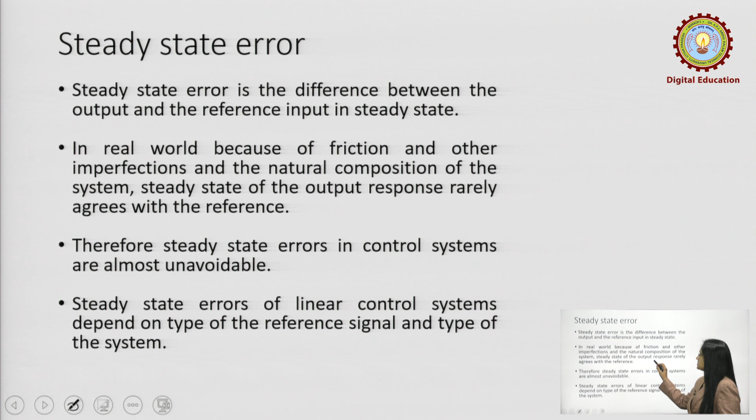Steady state error is the difference between the output and the reference input in the steady state. In the real world, because of friction and other imperfections and the natural composition of the system, the steady state output response rarely agrees with the reference. We expect a certain value of output as the desired output, and achieving that desired output is actually not very easy, just because the real world has many imperfections and natural composition. There are various elements in the system, and due to these elements, obtaining the steady state value or the desired value is not very easy.

The steady state errors in control systems are almost unavoidable, and steady state errors of a linear control system depend upon two quantities. One is the type of the system, and the other is the reference signal. Reference signal means whether it is a step input, a ramp input, or a parabolic input, because different test signals are applied to a control system to check its response for different kinds of input. So that becomes the reference signal, and now we will understand what is the type of the system.

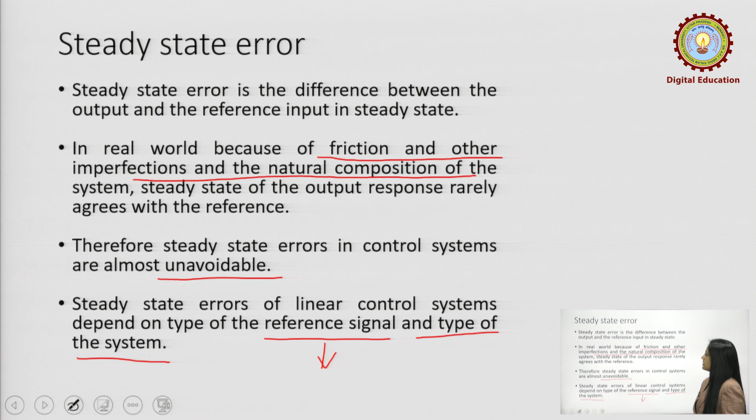Now, to understand the type of a system, what do we mean by type of a system? We are going to consider a control system with unity feedback. R of S is the reference input, E of S is the error signal, and C of S is the output. G of S is the forward path transfer function, and H of S is 1, since it is a unity feedback system.

So what is the output C of S? C of S is equal to the forward path transfer function multiplied by E of S. And what is E of S? E of S is the output of the summing point, that is the difference of the signals. C of S is compared with the reference signal R of S, so E of S is R of S minus C of S. And what is C of S? It is the forward path transfer function multiplied by E of S. Substituting this relation, we get E of S, the error signal, which is the difference between the reference input and the output. Therefore it is known as the error signal.

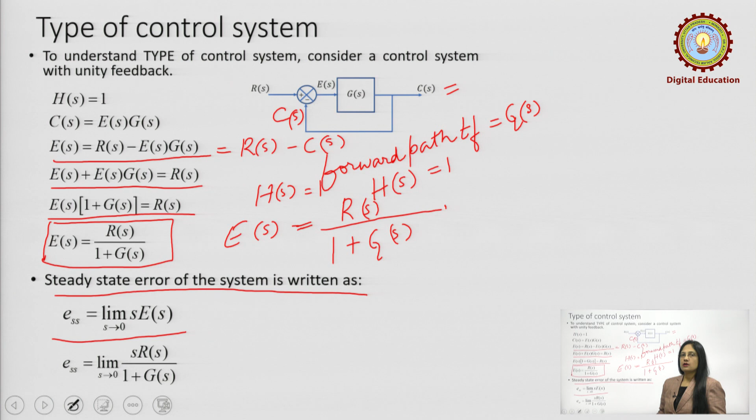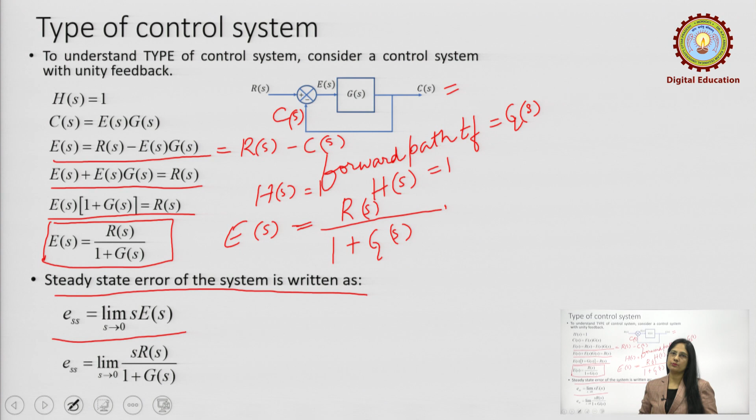Steady state error is the difference of the reference input and the output when time reaches infinity. So in the S domain, following the limits, limit S tends to 0 — that is the final value theorem — operating on the final value theorem, the steady state error is equal to limit S tends to 0 of S times E of S. This comes from the relation of the final value theorem. And what is E of S? E of S is R of S upon 1 plus G S, where G S is the forward path transfer function and R S is the reference signal given to the system. Therefore, the value of steady state error is limit S tends to 0 of S into E of S. So we can see that the steady state error is dependent upon the reference input R of S.

Now, what do we know by type of the system? What is type of the system? Type of the system is the number of poles G of S has at S equal to 0, and that decides the type of the system. G of S is the forward path transfer function.

For example, G of S is 10 S plus 2 upon this denominator. Here you can see that there is only one pole at origin, S equal to 0, meaning the number of poles at origin. If the number of poles at origin is 0, then it is a type 0 system, and if the number of poles at origin is 1, then it is a type 1 system.

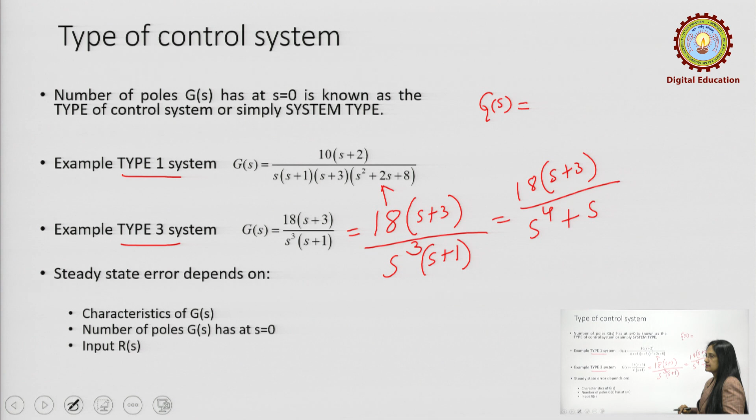So, the type of this system is 3, whereas the order of the system is 4, because when you multiply this, it becomes 18 S plus 3 S raised to 4 plus S. So, the order of the system is 4 and the type is 3. The number of poles at the origin decides the type of the system.

Here it is a type 3 system.

Similarly, if you have, for example, G of S equal to 18 upon S square times S plus 1, this is a type 2 system, whereas the order of the system is 3.

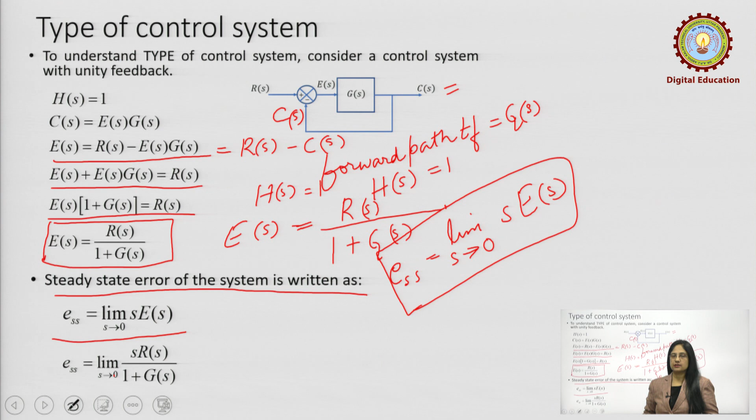So, therefore, steady state error depends on what is the characteristics of G of S. We know this relation because steady state error has a term G of S. So, characteristics of G of S, that is the transfer function, forward path transfer function, and the number of poles G S has at S equal to 0, and what is the reference input.

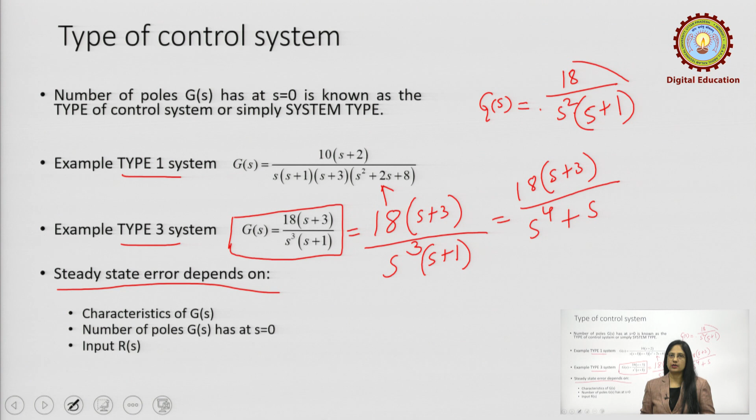What is steady state error with step input function? Now, for a step input function, R of S is 1 upon S.

Now, we will understand in the further lecture how the type of the system and the reference signal are related to the steady state error of a system, because steady state error is S into R s upon 1 plus G s. So, there is a term S in the numerator. So, type of the system affects the steady state error as well as the reference input signal given.

Now, we will study this for a unit step function, and we will study this for a ramp function as well as a parabolic function. We will understand what would be the steady state error when different inputs are given for different types of the system.

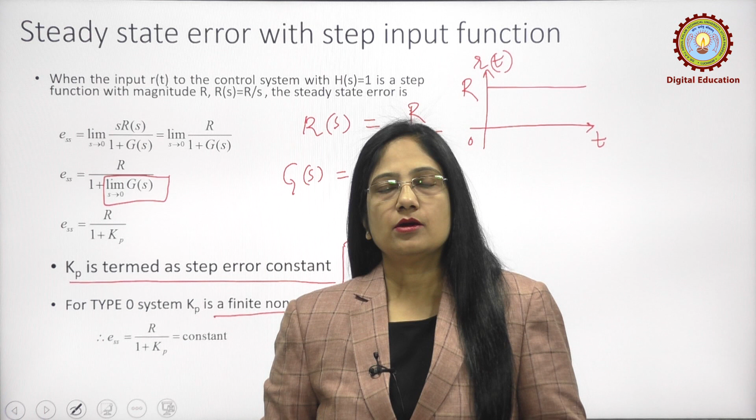When there is no pole at the origin for a type 0 system, Kp will always have a finite non-zero value, because limit s tends to 0 of G of s is Kp. For example, if G of s is a type 0 system like s plus 3 upon s plus 4, the constant Kp will have a finite constant value because there are no poles at the origin, so the denominator of G of s will not have any term s in it.

Therefore, for a type 0 system, Kp always has a finite, non-zero constant value. Now, what will be Kp for a type 1 system? For example, G of s equals s plus 1 upon s into s plus 3, this is a type 1 system. In this case there is one pole at the origin, so when you take s tends to 0, Kp becomes infinite. That is, for a type 1 system, Kp is infinite, and therefore the steady state error is 0 when subjected to a step input.

Similarly, for a type 2 system, Kp is infinite since G of s has two poles at the origin. For example, G of s equals s plus 1 upon s squared into s plus 3. This is a type 2 system because there are two poles at the origin, and when s tends to 0, G of s evaluates to infinite. Therefore, the steady state error is 0.

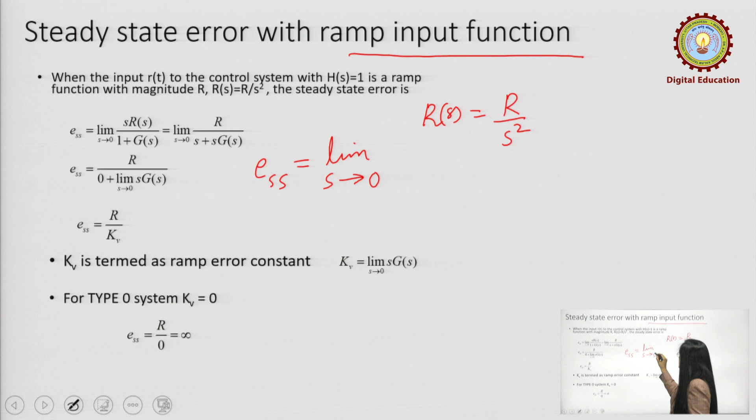So what is ESS? ESS is limit s tends to 0 of s times E s, and E s is R of s upon 1 plus G of s. So what happens now when we are applying a ramp function? ESS is limit s tends to 0 of s times r upon s squared, divided by 1 plus G of s.

Now only the term s cancels out, leaving s in the denominator, that is s plus s G of s. When you apply the limit s tends to 0, this quantity becomes 0, and limit s tends to 0 of s G of s is termed as Kv, the ramp error constant. So ESS now is R upon Kv. As we had seen, the step error constant Kp is limit s tends to 0 of G of s, whereas the ramp error constant Kv is limit s tends to 0 of s G of s.

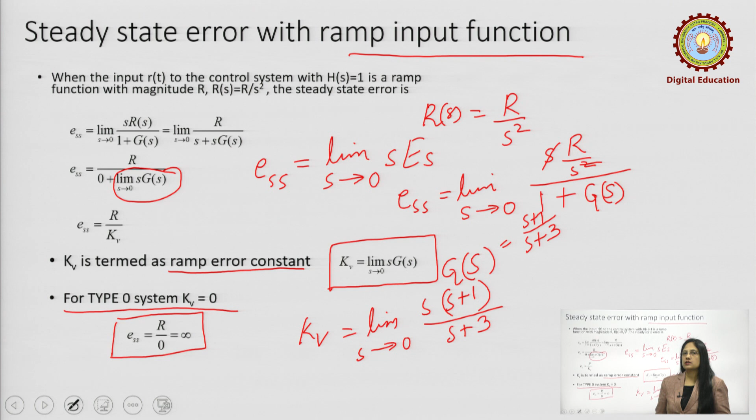So in this case, the ramp error constant will always give you a 0 value, because there is a term s in the numerator. So when you apply a ramp input for a type 0 system, the ramp error constant, that is the velocity error constant, will always be 0, and therefore the steady state error will be infinite.

Now for type 1 system, KV will always be a finite value. Let us take a type 1 system. In that case, G(s) for type 1 system is (s+1)/(s times (s+2)).

Now, in this case we can see that when sG(s) is evaluated, this type 1 s in the denominator will always cancel out with the term s present here, and therefore ESS will always be a constant value, because KV will be a constant value for a type 1 system, and therefore the steady state error will always be a constant value.

Now for type 2 system, the denominator of G(s) has 2 poles at the origin. When there are 2 poles at the origin, we can see what happens to KV when you evaluate G(s). KV is equal to limit s tends to 0 of s times (s+1)/(s square times (s+2)).

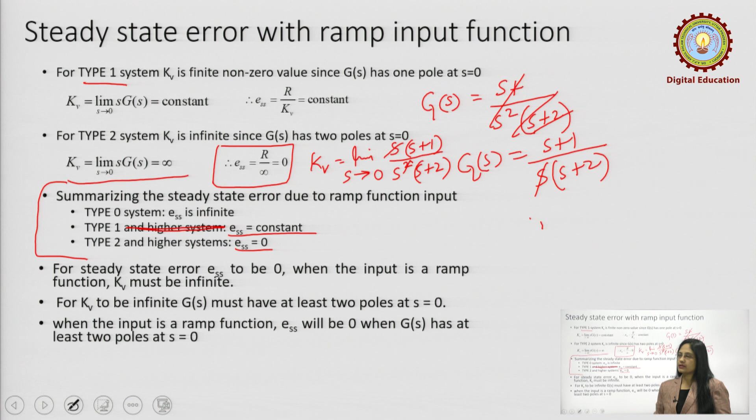Now, when the control system is subjected to a parabolic input, what will be the steady state error? As we have seen, ESS is equal to limit s tends to 0 of s times G(s), s times E(s). So it becomes sR(s)/(1+G(s)H(s)). Here R(s) equal to R/s cube is the reference input.

So replacing R(s), we have s square in the denominator. So ESS, applying limit s tends to 0, will give 0, and this term is known as the parabolic error constant, given by the relation Ka, where Ka is equal to limit s tends to 0 of s square G(s).

Now we will do the analysis for type 0 system. We understood what is a type 0 system. Type 0 system means there are no poles at the origin, and when there are no poles at the origin, what happens?

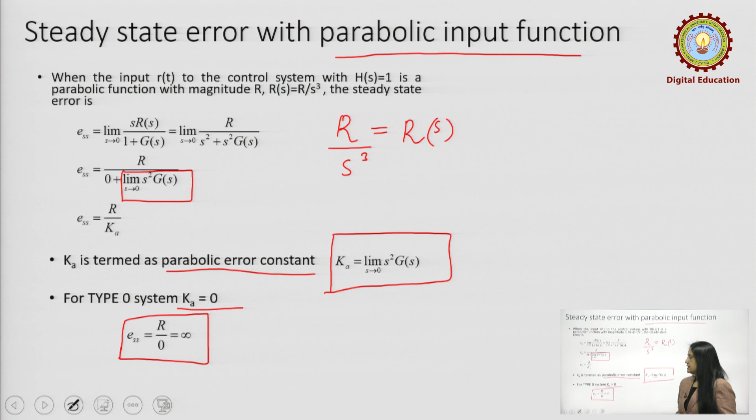There is a term S square always appearing at the numerator, and when this appears at the numerator, definitely Ka will be 0, and the steady state error for the condition when the input is a parabolic input, ESS will be infinite.

For type 1 system, since we have s square in the numerator and type 1 system has one pole at the origin, let us take a type 1 system: Ka equals limit s tends to 0 of s square times (s plus 1), upon... type 1 system has only one pole at the origin and the denominator could be s plus 1, s plus 2, s plus 8, anything. The order of the system could be anything, but the type of the system is 1, meaning there is only one pole at the origin.

Therefore, the numerator will still have one term s remaining, so Ka will always be 0, and in that case ESS will be infinite. For type 2 system, there will be two poles at the origin, and when there are two poles at the origin, there is no s term in the numerator, so Ka will always be a constant value, and the steady state error will also be a constant value.

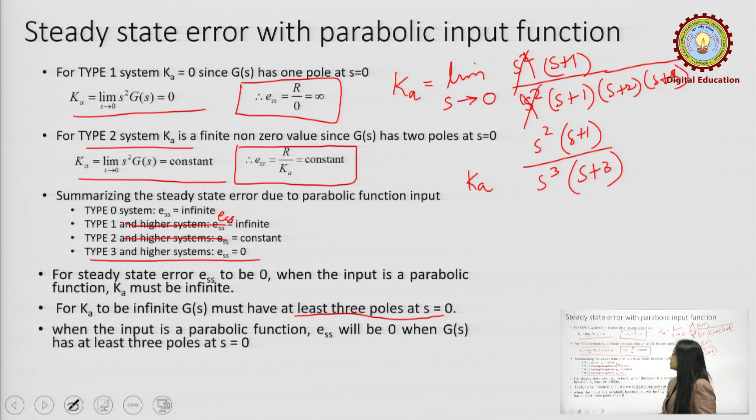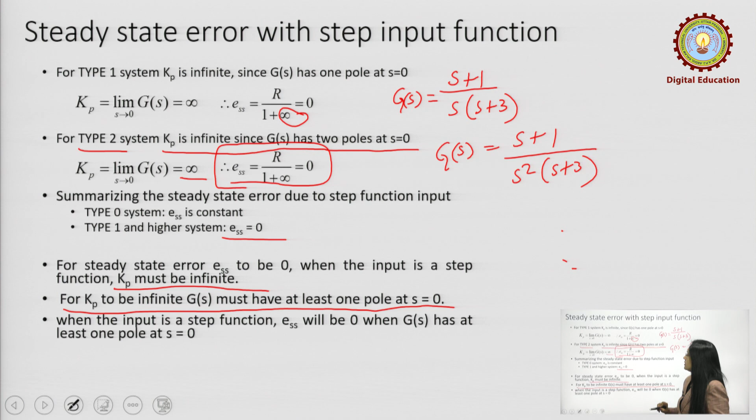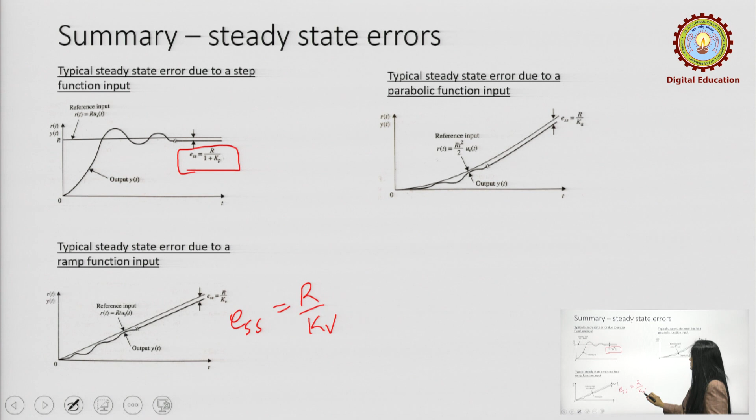Similarly, for a parabolic function, this is a parabolic input, the input is parabolic, and the error is given by ESS equals R upon Ka.

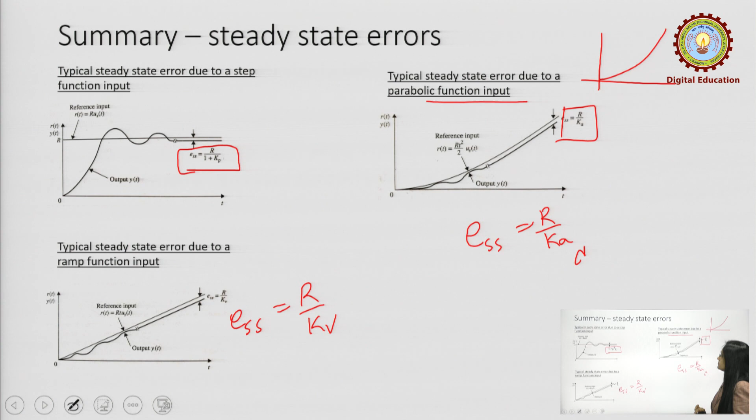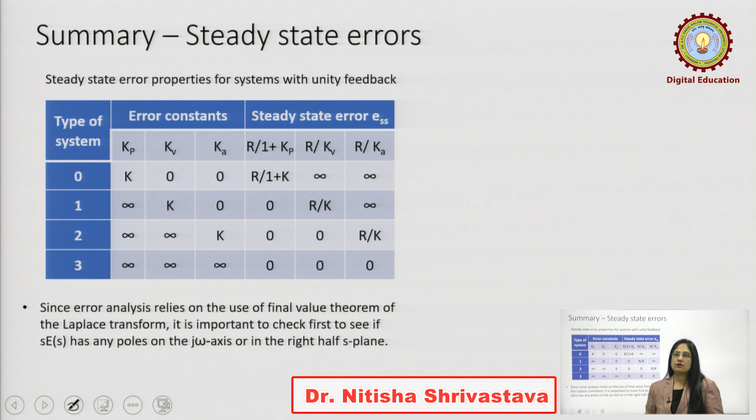Since error analysis relies on the use of the final value theorem, care has to be taken to check the location of any pole on the right half S plane, since the entire value of the steady state error is dependent on the final value theorem. So it is important to first check if sE(s) has any poles on the j omega axis or on the right half of the S plane.